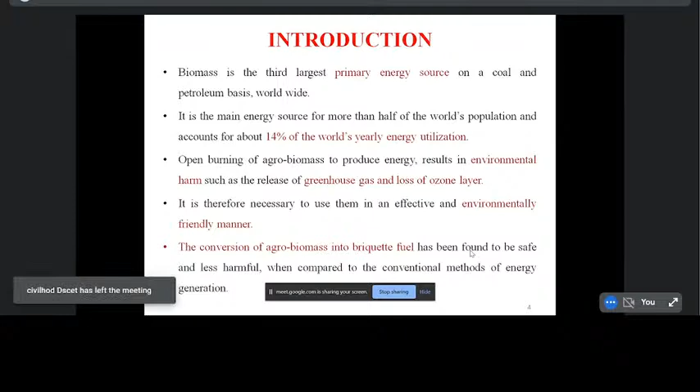Okay, so before we start the main part of the topic, I have to give some introduction about this topic. The developed and developing countries like US, China, UK, and some European countries have done a lot of research related to renewable energy, but they have failed to convert that research into industrialization. So that is the biggest problem we are facing currently.

We are facing a world energy demand. We daily see on news channels that every time all the countries, and also all the states in our country, are facing electricity problems and energy demands. Industries are also facing the energy problem. So here I am attempting to use biomass from agricultural waste.

The farmers, knowingly or unknowingly, are burning agricultural waste through open burning, which causes environmental problems, releasing greenhouse gas, causing ozone layer depletion, and also creating air pollution. So it is necessary to use them in an effective and environmentally friendly manner.

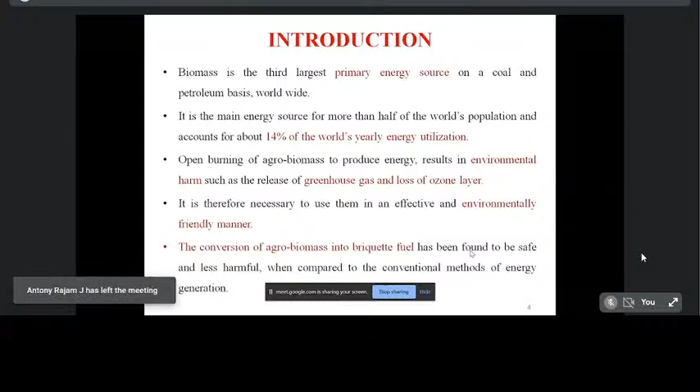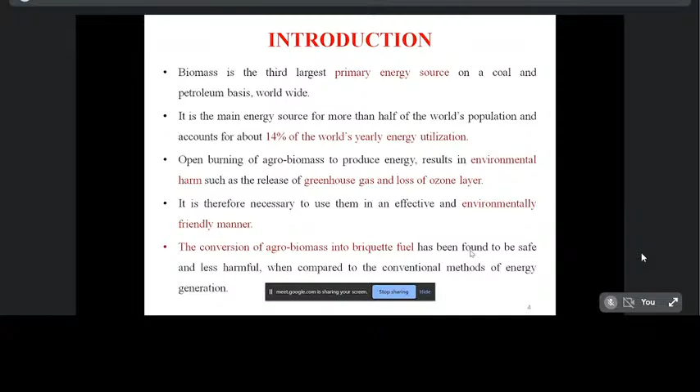So the only way is to convert the waste into a product. Here an attempt has been made to convert agricultural waste into briquette fuel. This solid biomass briquette fuel has been found to be safe and less harmful compared to coal and petroleum product usage, with much lower harmful emissions compared to other energy generation methods.

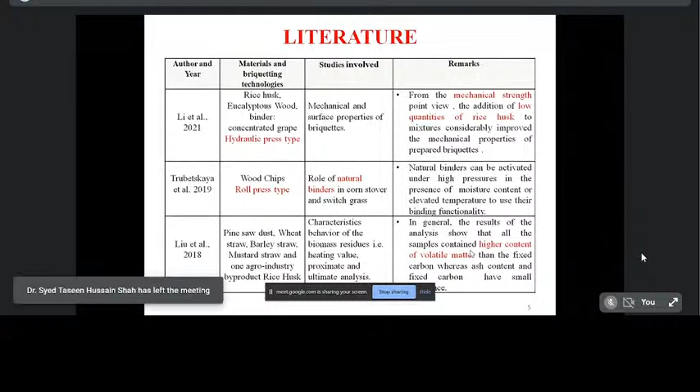Now regarding the literature review - why we take a literature review: suppose I am doing research related to biomass, or some material, or environmental sustainability, or water and wastewater treatment. Before, many researchers have studied and used different materials and different technologies, and obtained different results for their particular area. That's why I am taking some literature related to this study.

So Li et al. 2021 used the materials rice husk, eucalyptus wood, and binder concentrated grape, with the hydraulic press method. And Trubetskaya, in the year 2019, used wood chips with a roller press type method.

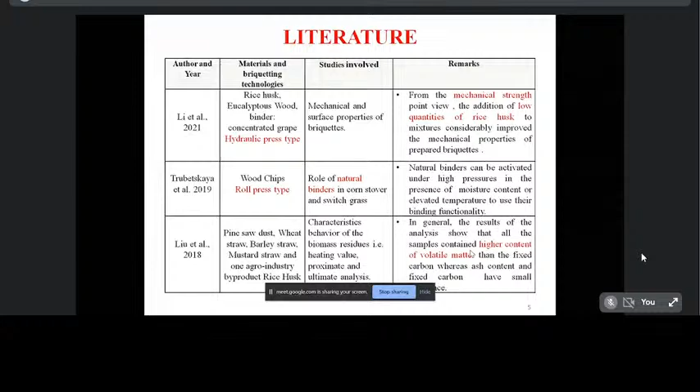So the main studies involved in this literature include mechanical properties, physical properties, biological properties, thermogravimetric analysis, and what type of binders they are using, what mixed ratios they have taken, and what mechanisms they are using - these are the things we have to infer from this literature.

From the literature I have referred, different compositions of biomass show different physical and chemical properties, and different mix ratios of the briquette show different physical and chemical properties.

During the mixing of waste materials, one or two or more than two materials, binders play a vital role in the quality of the briquettes. The binder is the important material that has to bind more than one or two materials together. Different binders also produce different quality briquettes.

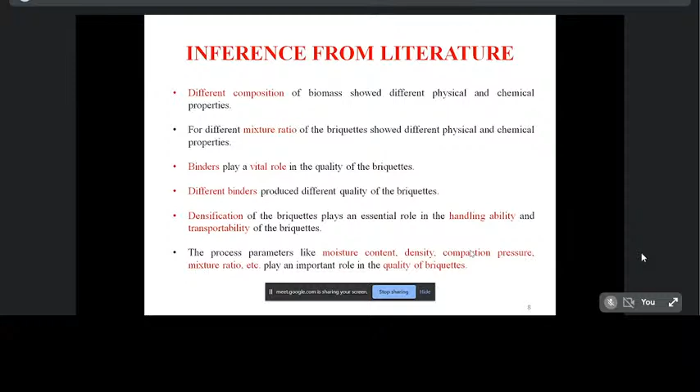In this literature, the main thing I have referred is that densification of the briquettes plays an essential role in the handling ability and transportability of the briquettes from one place to another. Without proper densification, it is not possible to transfer the produced biomass briquettes from one place to another. Process parameters like moisture content, density, compaction pressure, and mixture ratio play an important role in the quality of the briquettes.

Now, the problem identification. We know why we are taking up this type of research, why we are going to do research in that particular area. Depending upon the problems only, we have to do research. The burning of agrarian waste has become a major problem in India.

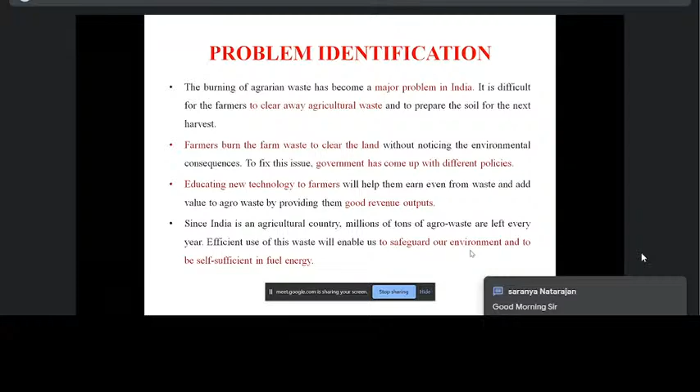For example, Delhi air pollution. It is difficult for farmers to clear the agricultural waste and prepare the soil for the next immediate harvest. So, knowingly or unknowingly, they burn their agricultural waste, which creates a lot of consequences for the environment. Farmers burn the farm waste to clear the land without noticing the environmental consequences.

To fix this issue, the government has come up with different policies. Educating farmers about new technologies will help them earn even from the waste and add value to the agricultural waste by providing good revenue. Since India is an agricultural country, millions of tons of agricultural waste are left over every year. Efficient use of this waste will enable us to safeguard our environment and become self-sufficient in fuel energy.

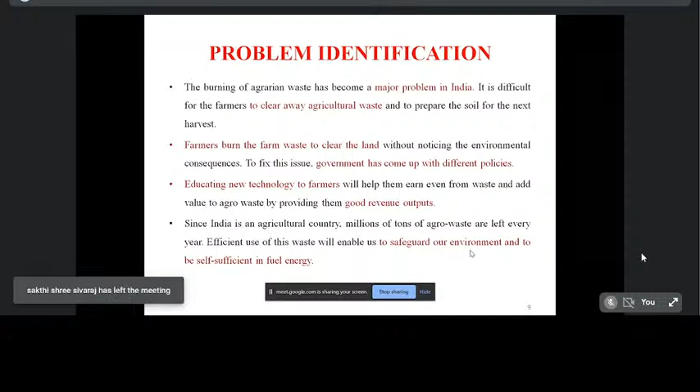According to a recent survey, it has been estimated that burning of agricultural waste residue releases about 149.24 million tons of carbon dioxide, 9 million tons of carbon monoxide, 1.28 million tons of particulate matter, 0.25 million tons of sulfur, and 0.07 million tons of black carbon during burning of agricultural waste alone in our country. This is also responsible for the haze in Delhi.

It also melts the glaciers of the Himalayas. While I was studying in school, I heard from my teachers that the Himalayan height is increasing every year. But now we are hearing that the height of the Himalayan mountains has actually decreased every year, due to the increase in temperature.

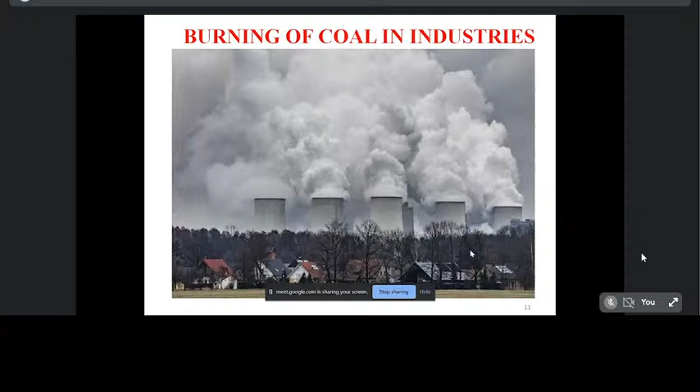There is also the generation of fly ash from burning coal. After using coal in thermal power plants, we store the generated fly ash in landfilling, either in dry condition or in wet conditions.

From the survey, it was found that the fly ash generated annually from power plants has risen from 123 million tons to 226 million tons in the year 2019-20, which is about a 76% increase compared to the previous year. As rainwater percolates into the dry form, it carries all the pollutants such as heavy metals.

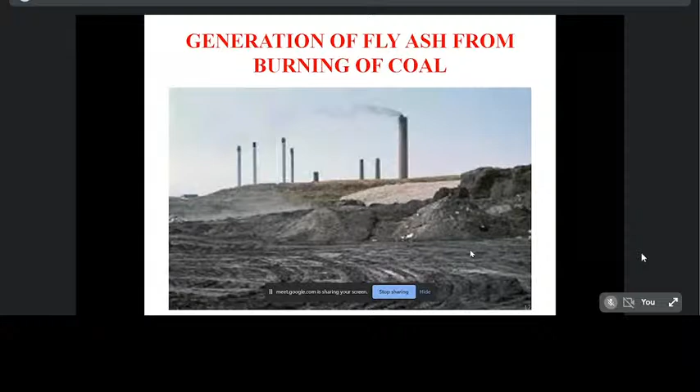Into the groundwater, it also pollutes lakes, ponds, and groundwater. This may also cause health effects for human beings who live near the mining surroundings.

Regarding deforestation, we all know this research and this topic is mainly focused on replacing the wood used in brick kilns, hotels, and other industrial boiler running purposes.

Deforestation increases the level of carbon dioxide in the atmosphere, which is a greenhouse gas and leads to global warming. It also leads to a limited supply of wood and timber, and it also leads to soil erosion.

The objectives of this study are: to investigate biomass made of different compositions for its characteristics, to optimize briquettes, and to study the quality of bio-briquettes for the effect of different combinations of agro waste with the binder.

And to study the results obtained from the physical characteristics, proximate analysis, SEM analysis, elemental analysis, DSC and TGA analysis, and the industrial applications for different fraction of mixes in the biomass briquette.

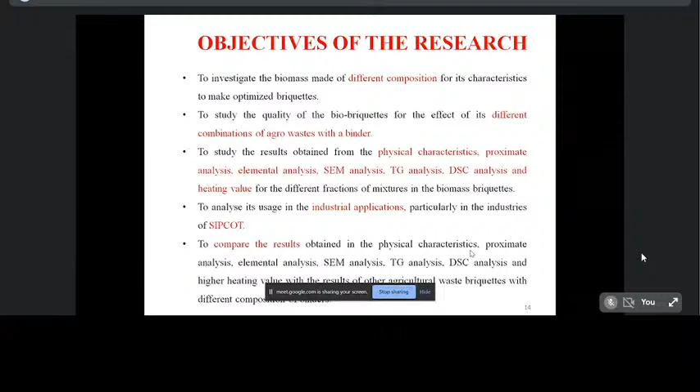To compare the results obtained from the physical characteristics, proximate analysis, elemental analysis, TGA, DSC, and heating value with the results of other agricultural briquettes with different compositions.

So regarding the methodology: before we start this research or this work, we have to frame a methodology for what we are going to do in this research.

Mainly we are focusing, suppose in civil engineering we have different streams, such as concrete technology and structural engineering, each department having a different stream. So I'm taking here the civil engineering department.

So there's environmental engineering, concrete technology, steel, remote sensing engineering, construction management, and so on. From that, we have to finalize which type of stream to take. Here I'm taking environmental engineering.

In environmental engineering, different areas are there: energy, water and wastewater treatment, carbon footprint, climatic conditions, environmental sustainability - various parts are there.

From that, I have taken waste to wealth, that is energy conversion from waste. So after finalizing the stream and area, I have taken the next level as problem identification.

So I'm mainly focusing on which type of problem I am addressing. After defining the problem, I have taken some literature review - previous studies where experts did their research related to that particular study. This means I have inference from a lot of information from that literature study.

After the literature study and information gathered from previous experts' research, I took the next step: material selection. From my area or locality, I identified what type of waste, mostly agricultural waste, is generated, and how that waste causes environmental pollution. That is how I selected the material.

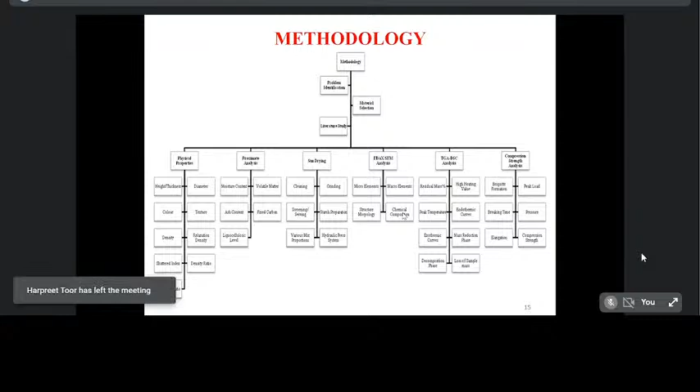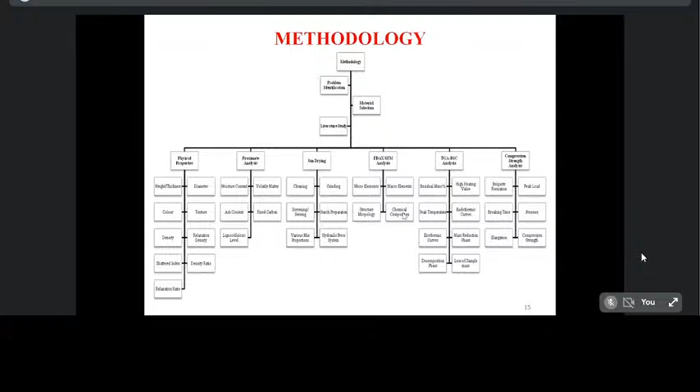Why do we study compression strength? It means we have to find out the strength of the produced biomass briquettes. Then only it is able to transport from one place to another and able to be stored for a long time. Here I have taken three different materials: sorghum, panicle, and pearl millet, used to produce the solid biomass briquette.

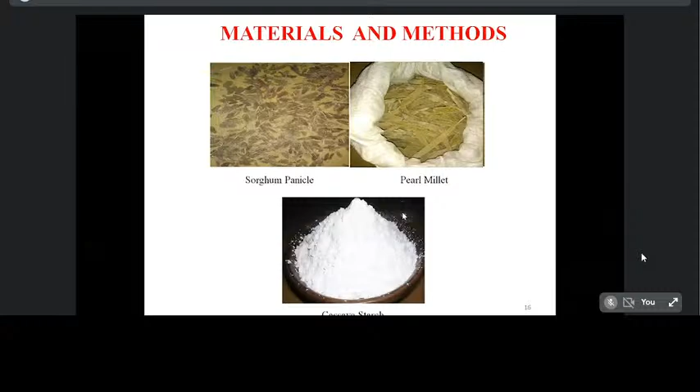Cassava starch is used as a binder, purchased from the industry. So before collecting the material, the agro waste materials sorghum, panicle, and pearl millet, we prepare the cassava starch.

This means we do some feedstock pre-processing: cleaning, drying, and size reduction. Cleaning is also simply called sieving, which is done to remove all unwanted materials, ensuring that the feedstock is of the required size.

We have to remove unwanted material present in the collected biomass materials, that means in sorghum, panicle, and pearl millet.

The next step is drying. Drying is essential, particularly if the feed is wet. Suppose we are collecting that sorghum, panicle, and pearl millet in wet condition, then we have to allow the collected agricultural waste materials to undergo sun drying.

Some materials like coffee husk, groundnut shell, and rice husk usually may not require drying. These are the sorghum panicles, corn stalk, and sunflower waste. If pearl millet is in wet condition, we definitely allow that material to undergo sun drying.

According to Solana et al. 2018, drying can be done naturally by exposing the feedstock to favorable environmental conditions to reduce its moisture content, without supplying any external heat.

If we give any external heat for drying that waste material, it will deplete the condensed moisture present in the waste materials.

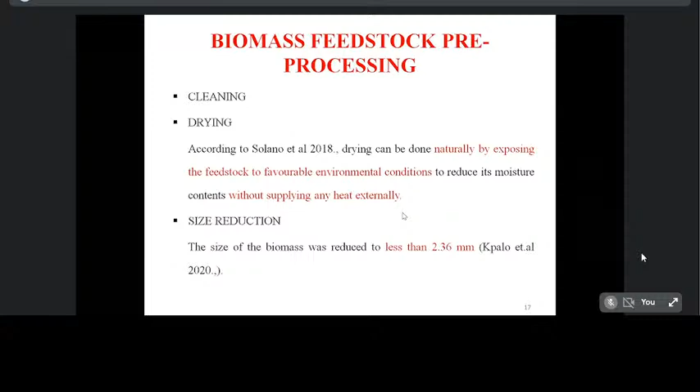Here I am taking 2.36 mm, because the smaller size of the collected agro-waste material will give the higher density.

This image shows the produced biomass briquette material being grinded and sieved, and allowed for natural drying of the agro waste materials.

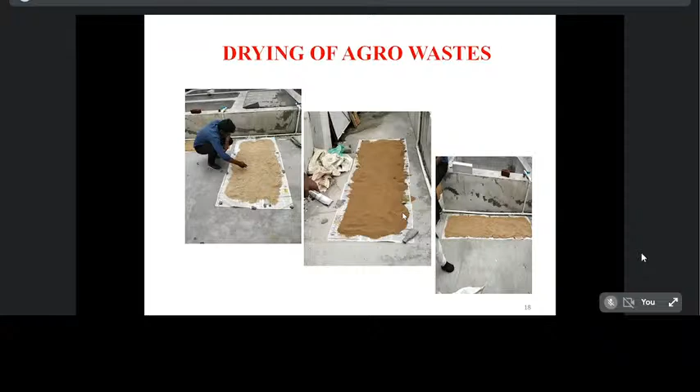The next step is binder preparation. Here I am using cassava starch as a binder for the production of agricultural waste briquettes.

The less than 0.5 mm sample is mixed with 150 ml of distilled water and made to dissolve. While preparing this cassava starch binder, proper care should be taken at this stage to avoid the formation of clogs and lumps. The formed binder solution is heated in a water bath at 100 degrees Celsius.

This is done for 10 to 15 minutes as per Sen et al. 2016. The mixture is continuously stirred until a whole paste is formed, meaning a semi-solid formation.

In the process of briquette production, the starch is added to the sample at a concentration of 10% of the weight. The produced biomass briquettes take the binder solution added as 10% of the weight.

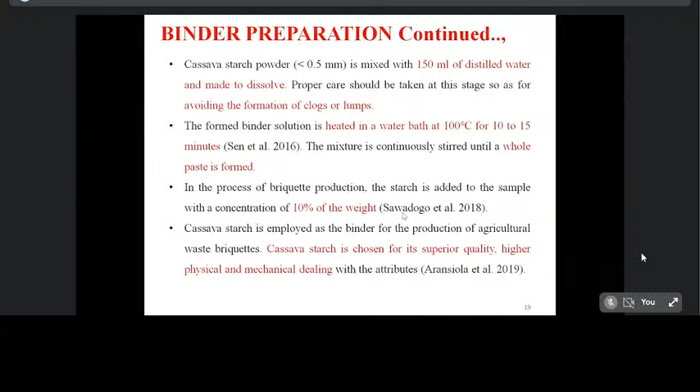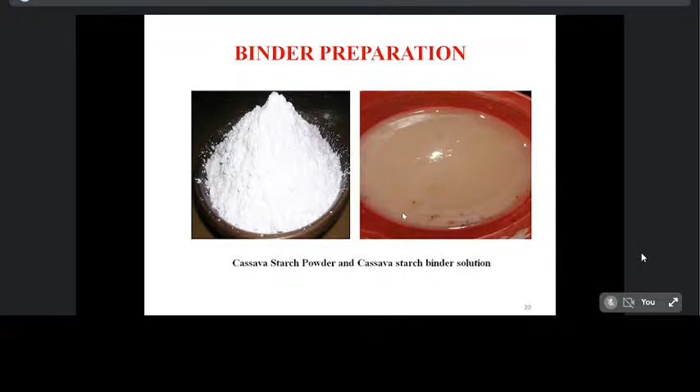This image shows the cassava starch powder, and the second image shows the produced cassava starch binder solution. After setting all the initial things, the agricultural waste material collection and initial feedstock pre-processing are completed, and the starch solution is also prepared, along with sun drying and grinding.

After all the basic things are completed, we are going to prepare a briquette mold. Here, a cylindrical briquette mold was used, having an inner diameter of 80 mm, consisting of 3 parts.

The top portion is a shaft part, the center portion is the mold, and the bottom portion is a steel plate. The cylindrical mold has a diameter of 80 mm, thickness of 8 mm, and height of 150 mm.

The compaction piston used has a diameter of 76 mm, height of 175 mm, and total weight of 10 kg. The steel plate at the bottom was attached to the edge of the base and firmly tightened.

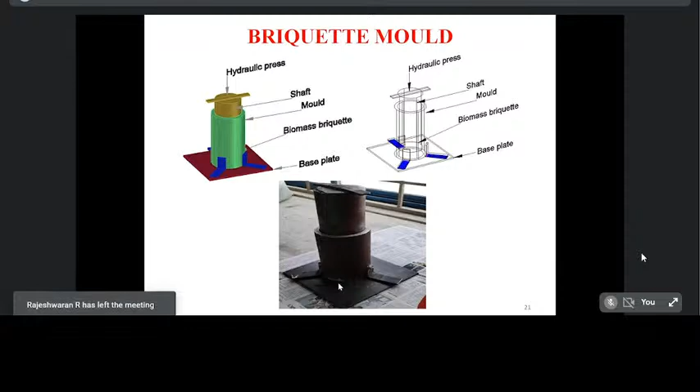The molded briquette was evacuated by expelling the plate from the base edge. The hydraulic press was used for production of the biomass briquette to get a uniform size of the solid biomass briquette. This is the machine we have in our structural engineering laboratory at Kongu Engineering College.

This machine is called the Controlled Universal Testing Machine, model TUF Servo 1000, with a maximum load of 1000 kilonewton, as illustrated in this image.

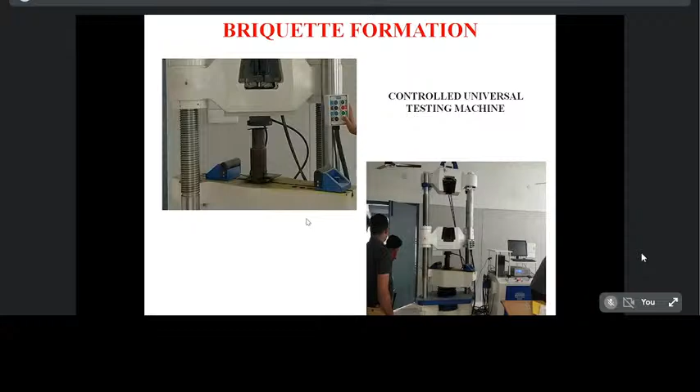Here I set a constant load of 200 kilonewton, maintained throughout the experiment. The dwelling time of each press was sustained at 60 seconds to attain constant sorghum panicle and pearl millet briquettes in all the given samples.

Regarding the mixed ratio of loose biomass, I have taken sorghum panicle and pearl millet, with a binder ratio of 10% weight.

So the two constant solid bio-briquettes produced were 100:0, meaning 100% sorghum panicle and 0% pearl millet, and 100% pearl millet with 0% sorghum panicle.

The remaining briquettes were produced under various blended proportions, such as 10:90, 20:80, 30:70, 40:60, 50:50, 60:40, and inversely mixed, combining both sorghum panicle and pearl millet.

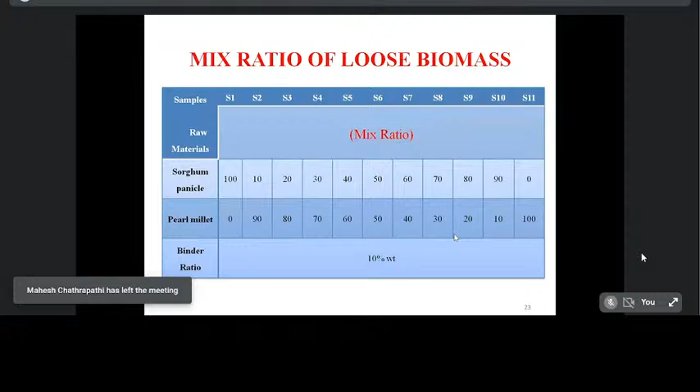While producing, different peak load levels were attained. We set a constant load of 200 kilonewton, but we got different peak load levels, which varied from sample S1 to S11.

Sample S1 had the minimum peak load of 186.440 kilonewton, attained also by S6, S7, and S8, while the maximum peak load was attained by samples S10 and S9.

Why do we see these different peak loads? The reason for the variation was the particle size of the pearl millet.

We have taken two materials here, sorghum panicle and pearl millet. The particle size of pearl millet was finer than the sorghum panicle, so the spaces between the sorghum panicle particles were closely filled by the finer particles of pearl millet.

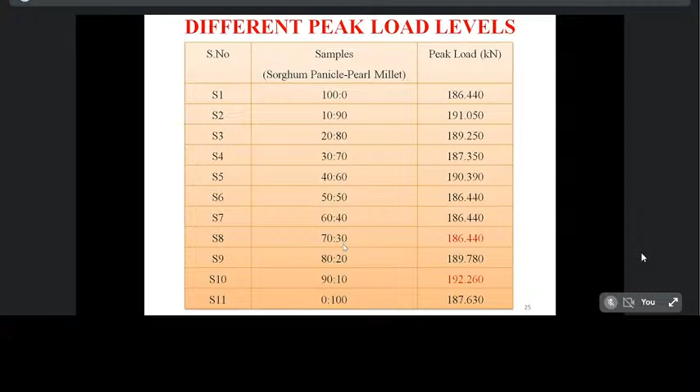This is the reason we got different peak load levels during the production of the agro biomass briquettes. This image shows the peak load graph for sample S11.

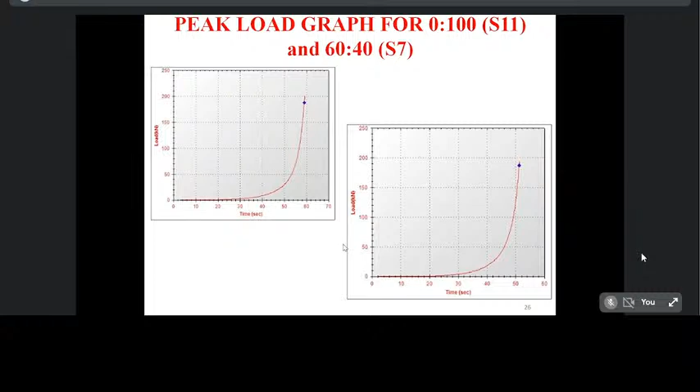Sample S11 is 0% sorghum panicle and 100% pearl millet, and sample S7 is 60:40, meaning 60% sorghum panicle and 40% pearl millet.

Coming to the results and discussion, the produced briquettes were tested for physical characteristics, proximate analysis, compression strength test, EDAX analysis, SEM analysis, TGA DSC analysis, industrial application, and comparison analysis.

Initially we are discussing the physical characteristics of the produced biomass briquette. All the produced biomass briquettes were analyzed based on ASTM standards, American Standard Testing Methods. The physical properties analyzed in this study are limited to diameter, height, thickness, mass of the produced biomass briquettes, volume, density, mass in relaxed stage, relaxed density, density ratio, relaxation ratio, shatter index, texture and color.

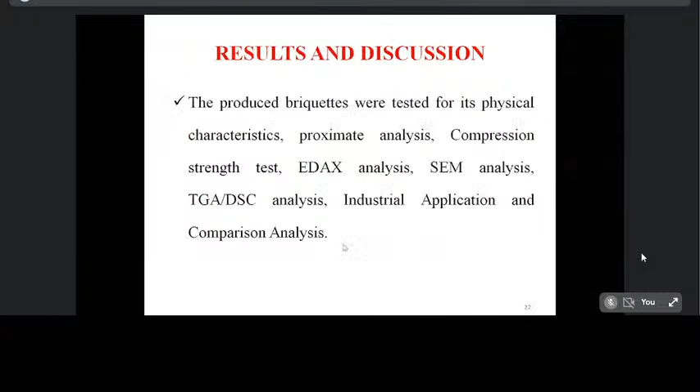The thickness of the sample ranged between 55 mm to 65 mm. This thickness range is the main reason for the voids present in the particular mixed proportions.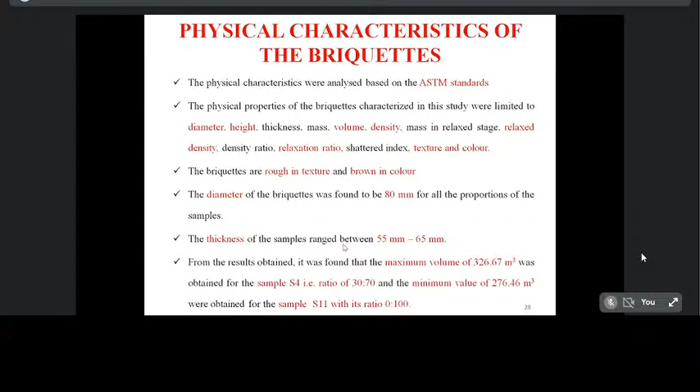From the results obtained, it was found that the maximum volume of 326.67 cubic meters was obtained in sample S4, and sample S11 attained the minimum value of 276.46 cubic meters.

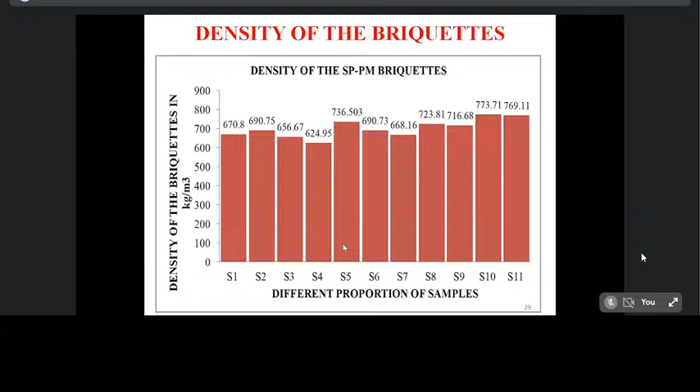This image shows the different densities of the briquettes from the samples. Sample S4 has the minimum density value of 624.95 kg per cubic meter, and sample S10 has the maximum density value of 773.71 kg per cubic meter. So the compressed density of sorghum panicle and pearl millet briquettes ranges from 624.95 to 773.71 kg per cubic meter.

This satisfies the minimum value. The density value required is 600 kg per cubic meter, as recommended by Mani et al. 2006, for efficient transportation and safe storage. The particle size of the raw materials is another consideration impacting density, because smaller diameter or smaller size agricultural waste particles give higher density.

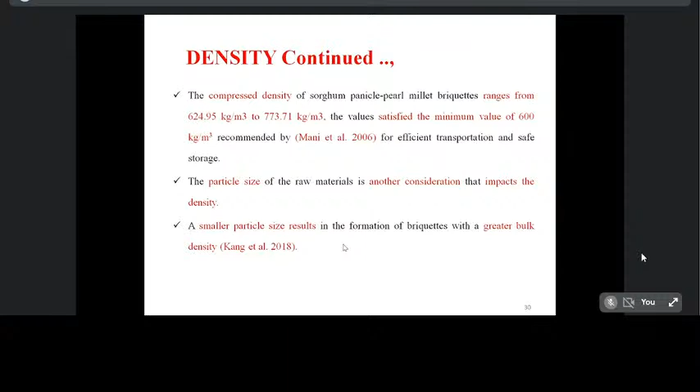Sample S6 has the lowest mass in relaxed stage at 197.86 grams for the sample ratio 50:50, and sample S10 has 208.14 grams for the sample ratio 90:10.

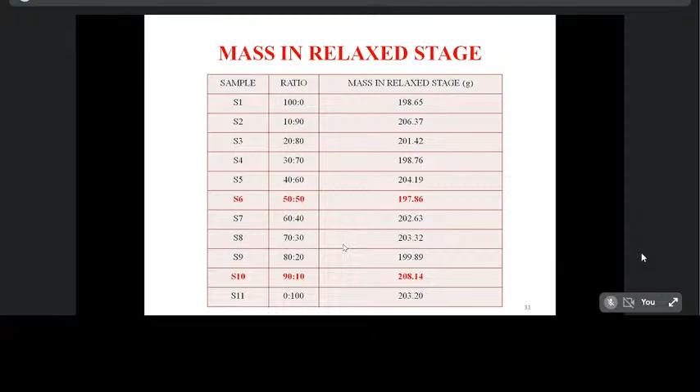The relaxed density of the sorghum panicle and pearl millet briquettes shows the minimum value achieved by sample S4 at 608.44 kg per cubic meter, and the maximum relaxed density achieved by sample S10 at 740.34 kg per cubic meter.

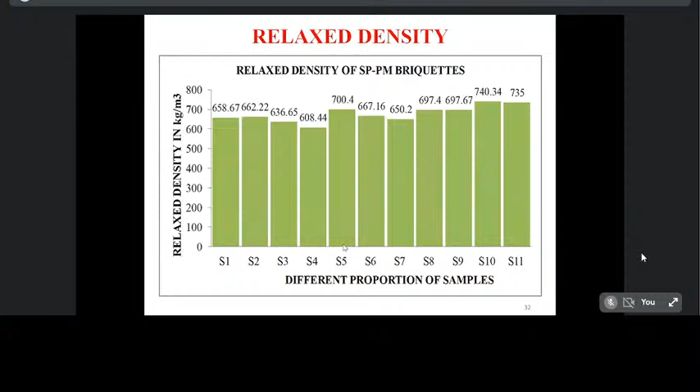The relaxation ratio, when greater than 1, also indicates good quality briquette. Here all the produced biomass briquettes achieve a relaxation ratio more than 1. The minimum value achieved is 1.019 for sample S1 with ratio 100:0, and the maximum value achieved is 1.052 for sample S5 with ratio 40:60.

The briquette shatter index was determined according to ASTM for the drop shatter test, developed for coal, using a specific equation. The shatter index equals the weight of the briquette retained on the screen after dropping. We drop the briquette from 1 to 1.5 meter height.

Each time, we have to drop the produced biomass briquette 3 times, noting the weight of the briquette after each drop. So it's weight after dropping divided by weight of the briquette before dropping. We weigh the briquette before dropping, and after each of the 3 drops we note the weight of the produced biomass briquette again.

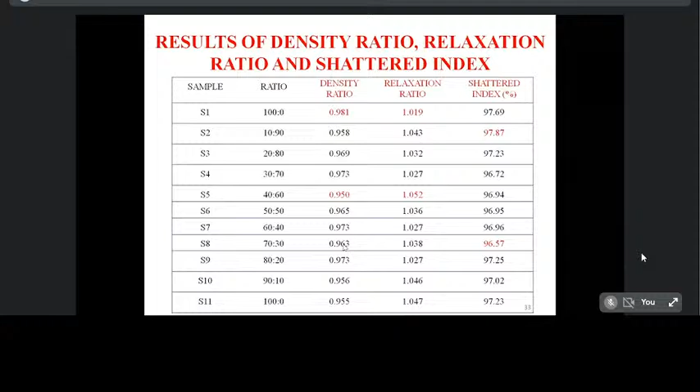A greater than 90 shatter index is achieved as a good quality for the produced biomass briquettes. Here all the produced biomass briquettes have more than 95. The minimum value was achieved for sample S8 with mixed ratio 70:30, with a shatter index of 96.57, and the maximum shatter index of 97.87 was achieved for sample S2.

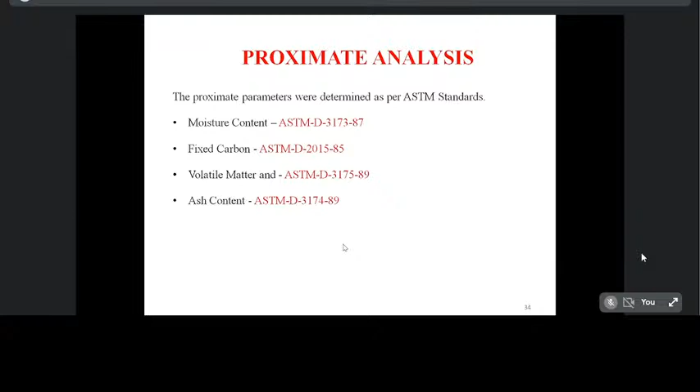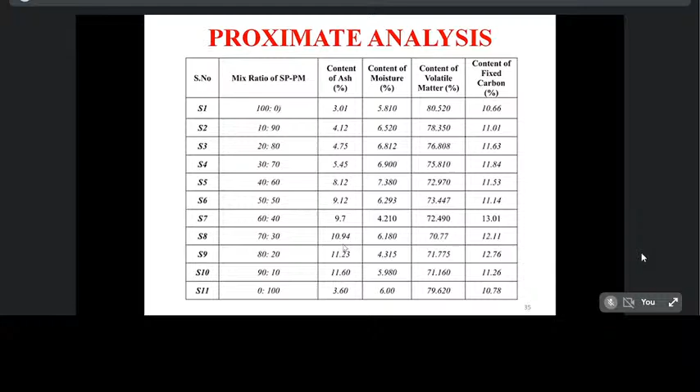Here the ash content values range from 3.01 to 11.60, and moisture content ranges from 4.21 to 7.380. The volatile matter also ranges from 70.77 to 80.520, and fixed carbon values range from 10.66 to 13.01 for sample S7.

The moisture content ranged between 4.21% for the minimum sample S7 and 7.38% for the maximum sample S5. These results agree with the study by Pallavi et al. 2013, which suggested that moisture content of 5% to 10% indicates a good quality briquette.

For ash content, the minimum value achieved was 3.01% and the maximum was 11.60% for samples S1 to S10. The ash content of the other mixing ratios was found to be within the acceptable limit, which ranges between 5 to 40 weight percentage. Here we get only 3.01% minimum and 11.60% maximum for the solid biomass briquette, as per the United Nations Environment Programme 2014.

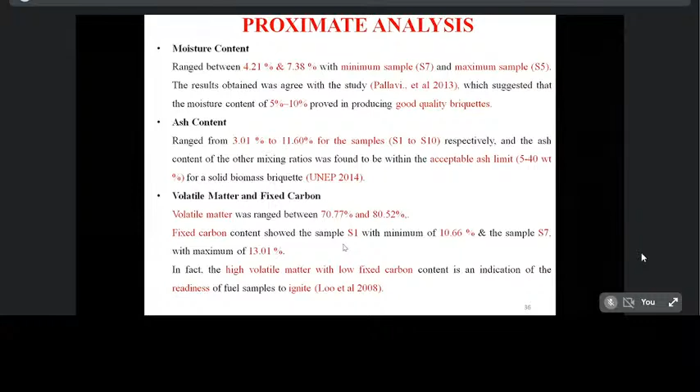The volatile matter and fixed carbon ranges also varied. In fact, high volatile matter with low fixed carbon content is an indication of the readiness of the fuel sample to ignite, according to Loo et al. 2008.

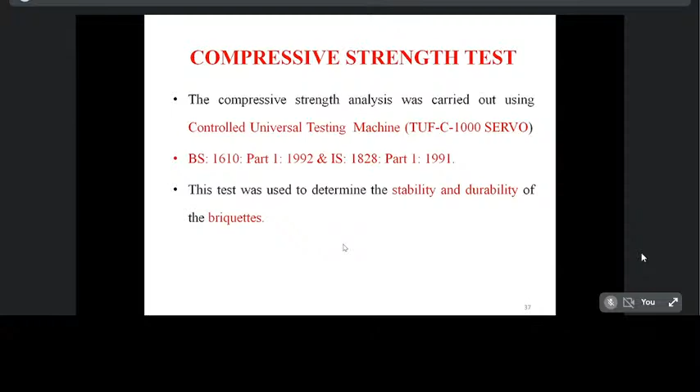Next is the compressive strength test. The same produced equipment was used to find out the compression strength testing. The machine is a controlled universal testing machine, model TUF-C-1000 Servo, working as per British Standard 1610 Part 1 1992 and Indian Standard 1828 Part 1 1991. This test was used to determine the stability and durability of the briquette.

This image shows the initial setup made with the controlled universal testing machine, and load was given. The second image shows the load being applied, and the final third image shows the cracks developed in that particular produced biomass briquette.

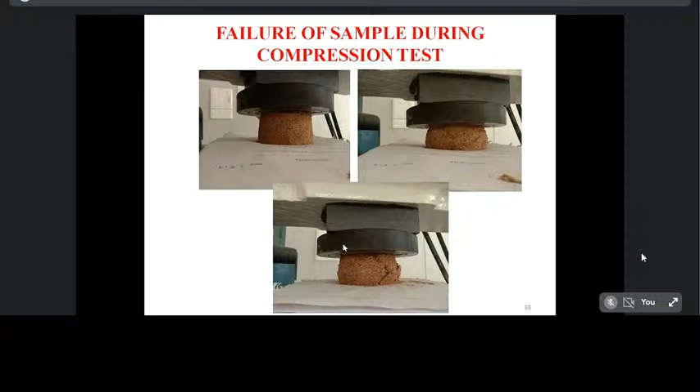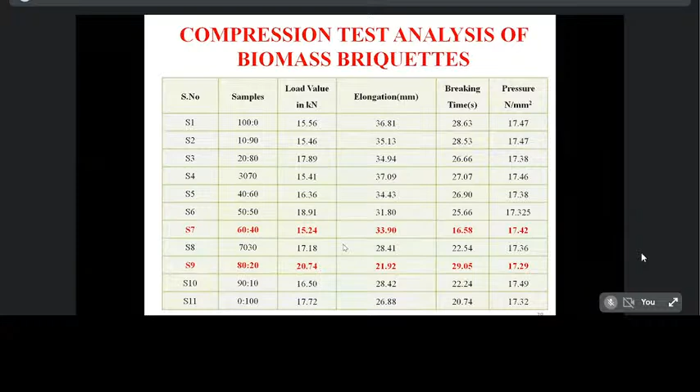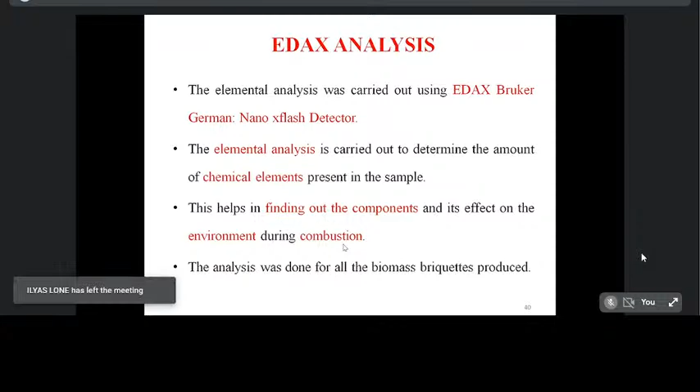Next is the elemental analysis, carried out using an EDAX Bruker German Nano xflash detector. This elemental analysis is used to determine the amount of chemicals, meaning the micro and macro elements present in the particular biomass briquette. It also helps to identify the components and their effects on the environment during combustion.

This table shows the various elemental analysis characteristics of the produced biomass briquette. We found nearly 14 elements: carbon, oxygen, potassium, calcium, chlorine, sulfur, phosphorus, silicon, aluminum, magnesium, copper, iron, zinc, and sodium.

Sample S5 has the minimum carbon content at 48.06%, and sample S9 has the maximum carbon content at 55.52%. The second leading value is oxygen, at 44.30% for sample S5 and 41.94% for sample S9. The remaining elements, nearly 12 of them, fall under acceptable values.

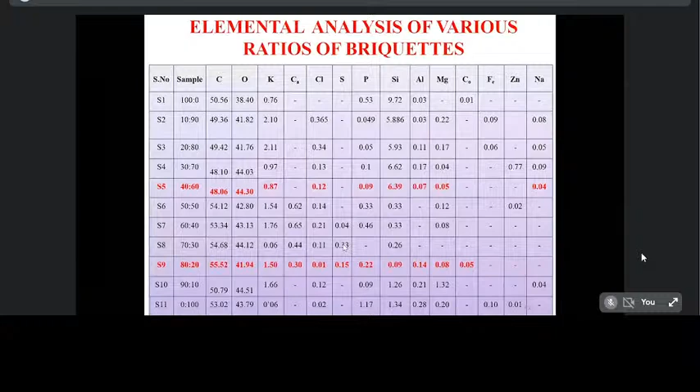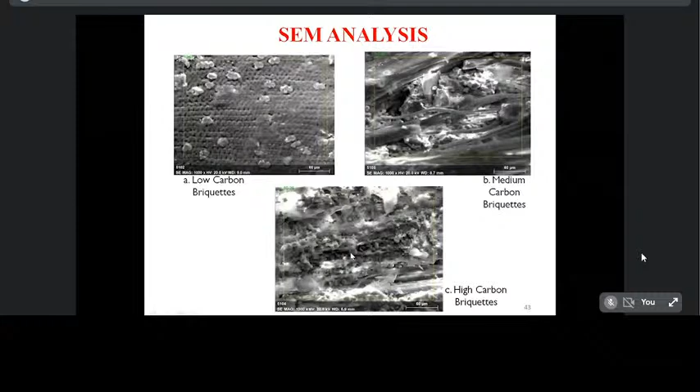Okay, so the TGA analysis. Thermogravimetric analysis is also used with the NETZSCH STA449F3 model, used to find out the percentage of weight loss or the residual mass of the briquettes made from sorghum panicle and pearl millet. This TGA analysis instrument is also operated based on the principles of ASTM D3418.

Here, 11 samples were produced from the solid biomass waste, but we have taken only 6 samples for the TGA and DSC analysis, based on the carbon percentage. The sample S1 has the highest weight loss, that is 28.28%, with a burning temperature of 547.9 degrees Celsius. The sample S9 has 26.07%, the lowest weight loss percentage, with their mixed ratio of 80% sorghum panicle and 20% pearl millet, and their burning temperature is 547.9 degrees Celsius.

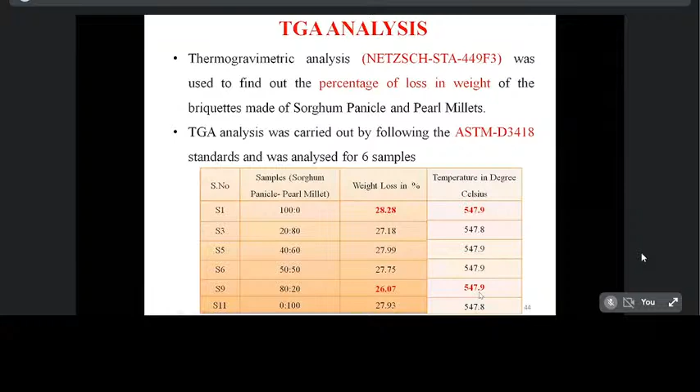This image shows the TGA and DSC analysis of the samples S1 and S9.

The reduction in the mass of the sample was observed starting from 100%. The reduction in mass loss was observed below 100 degrees Celsius, in the portion from 100 to 90, and this reduction is due to residual moisture loss. So there is no decomposition of the sample from 100 to 90. The curve was linear in the temperature range between 100 to 200 degrees Celsius, and from 100 to 200 degrees there is no decomposition, no deviation in the TGA curve.

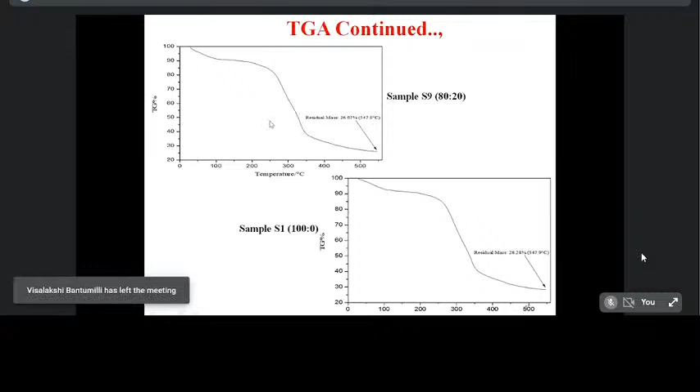Between the temperature 240 to 330 degrees Celsius, we assume a single stage decomposition is observed, mainly due to the reduction of mass of the sample. This single stage reduction is where carbon is converted into carbon dioxide and carbon monoxide, so the mass loss of the sample gets gradually reduced due to reduction in the composition of the combustible substances. The weight loss was found to be 28.28% at the temperature of 547.9 degrees Celsius, which is mainly due to the presence of non-combustible substances and ash.

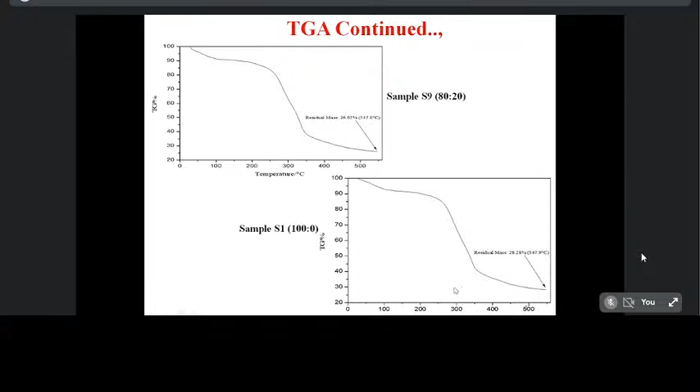The next one is the differential scanning calorimetry analysis. Here, the same samples S9 (80:20) and S3 (20:80) were used. The minimum peak value was achieved by sample S3 at 340.7 degrees Celsius, and the maximum heating value was achieved by sample S9 at 342.6 degrees Celsius. The differential scanning calorimetry analysis was used with the same TGA analysis instrument, used to find out the heating value of the produced biomass briquettes.

Here the reaction starts with exothermic and endothermic, both reactions applied here, forming an exothermic and endothermic reaction. Initially it started with exothermic and suddenly dropped to endothermic, with temperatures for both figures at 89.36 degrees Celsius to 76 degrees Celsius. The initial sudden exothermic to endothermic reaction happened mainly due to the sudden moisture loss of the produced biomass briquette.

The reaction becomes exothermic from the temperature 225 degrees Celsius for samples S9, S1, and S3, due to the release of energy from combustion of the organic matter. The distinct peaks were attained at temperatures 342.6 degrees Celsius and 340.7 degrees Celsius. The DSC curve was associated with the combustion of sorghum panicle and pearl millet, as the exothermic peaks achieved show the results of releasing energy by decomposition of fixed carbon and residual lignin.

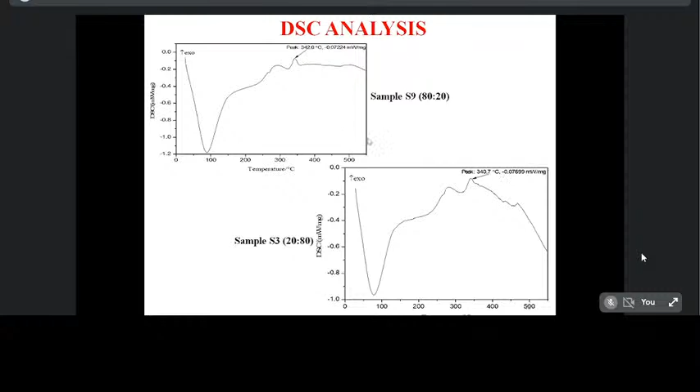So the next one is an industrial application. The produced biomass briquettes are involved in industrial application for two companies: Perundurai Common Effluent Treatment Plant and Shakti 19 Private Limited, located nearby in our college, in Sipcot Industrial Estate, Perundurai, Tamil Nadu.

The results from Perundurai Common Effluent Treatment Plant showed that briquettes with 80% sorghum panicle and 20% pearl millet satisfy the requirements of relevant activities like combustion heat, total moisture, and ash content. They also certified that with slight or no modifications, the briquette can be effectively used as a fuel energy source in treatment plants for boiler running purposes.

The briquette tested from Shakti 19 Limited showed that the combustion of 40% sorghum panicle and 60% pearl millet gives good combustion with minimum ash. The 40-60% biomass briquette and 80-20% biomass briquette also showed good combustion with minimum ash. They certified that the combination of briquettes can be efficiently used as a fuel energy source for industrial use in future.

This image shows the kiln furnace of the industry in Sipcot area, while burning the produced biomass briquette in the particular industries.

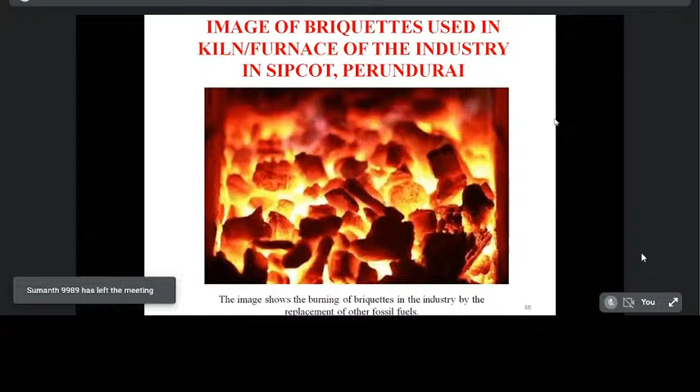So the comparative analysis of the physical characteristics of briquette - various materials are used here. Previous studies indicate various materials used with various particle sizes, ranging from 0.425 mm to 10 mm. Here we have taken less than 2.6 mm.

The diameter also varied from 24 mm to 96 mm. The height of the briquette also varied from 8-9 mm to 210 mm. Here they are using various technologies for production of biomass briquette: hydraulic press system, cylindrical die system, and vibratory block mold system.

The density is also varied - from 580, I mean 0.58, 580 kilogram per meter cube to 1100 kilogram per meter cube. The produced biomass briquette satisfies 716.68 kilogram per meter cube.

Most studies do not follow the shattered index value. The value taken for sawdust and neem as per Rajaseenivasan et al. 2016 has a shattered index value of 75%. But here we have produced sorghum panicle pearl millet briquette having 97.25%.

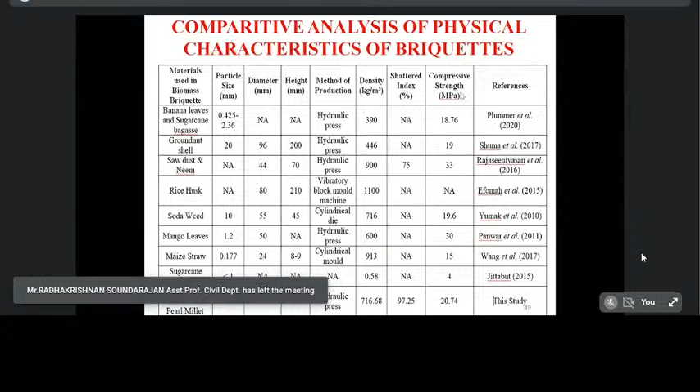The compression strength is also varied from 4 megapascal to 20.74 megapascal. So the comparative study of the proximate analysis of the biomass briquette - the proximate analysis indicates moisture content, ash content, fixed carbon and volatile matter.

The moisture content varied from 3.76% to 18.20%. Our study indicates 4.315%. The ash content varied from 0.69% to 24.43%, and fixed carbon indicates 5.7% to 73.04%. The volatile matter also varied across all the produced biomass briquettes. The produced sorghum panicle and pearl millet briquettes satisfy all the proximate analysis requirements.

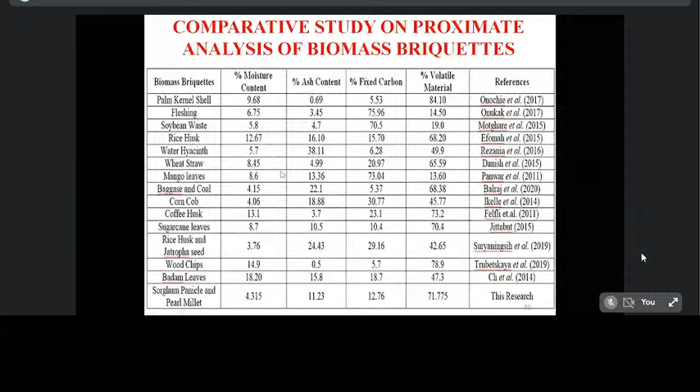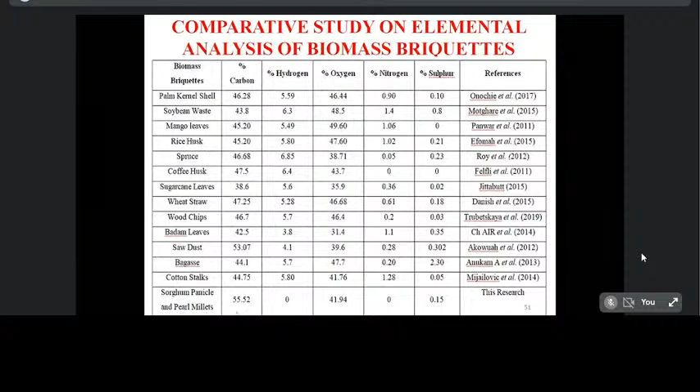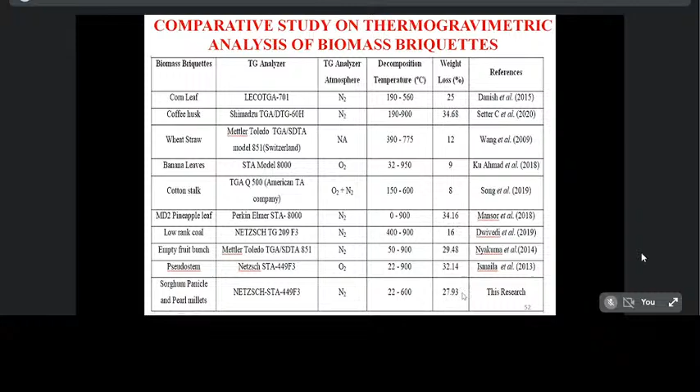The thermogravimetric analysis - all the produced biomass briquettes are compared with various biomass briquettes using different TGA analyzers with different atmospheres: nitrogen atmosphere, some equipments in oxygen atmosphere, and some in both nitrogen and oxygen atmosphere. Using the nitrogen atmosphere, produced biomass briquettes showed weight loss varying from 8% to 34.68%. Here the produced biomass briquette has 27.93%.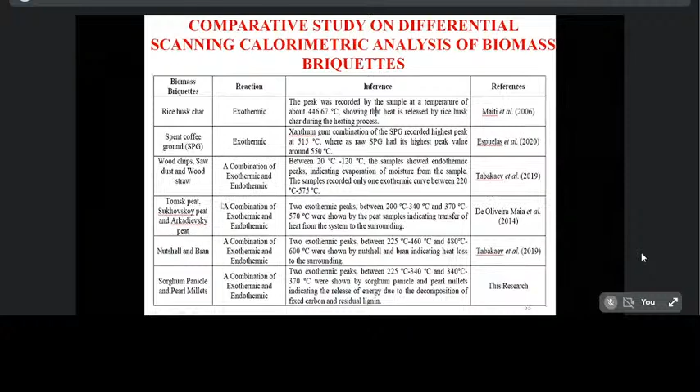So here the conclusion: the study has included handling factors such as density. The high density value is 773.71 kilogram per meter cube for sample S10, and the relaxed density is also highest for the same sample. Density is the main indicator for transporting the produced biomass briquette from one place to another. The maximum density ratio was achieved for sample S10 at 0.986, and the relaxation ratio was achieved for sample S10 at 1.047.

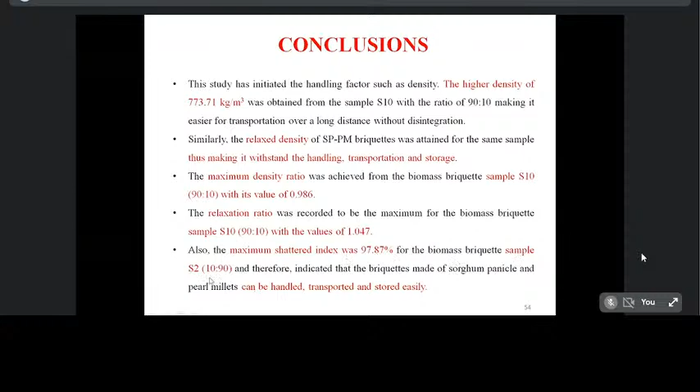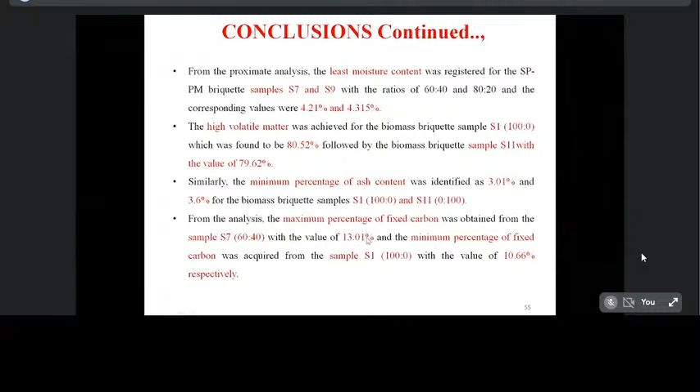The maximum shattered index was achieved as 97.87% for sample S2, and in the proximate analysis the least moisture content was achieved for samples S7 and S9 as 4.21% and 4.315%. High volatile matter was achieved for sample S1 as 80.52% and S11 as 79.62%, and minimum percentage of ash content was achieved for sample S1 as 3.01% and S11 as 3.6%. Fixed carbon was also achieved for sample S7 as 13.01% and S1 as 10.66%.

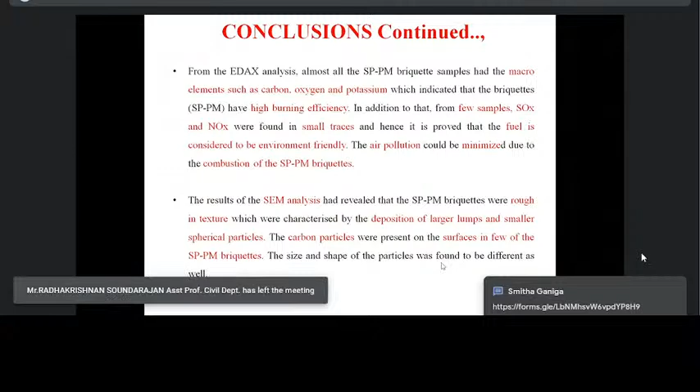The EDAX elemental analysis indicates macro and micro elements. Carbon is the leading value and oxygen is the second leading value. Potassium is also found in the produced biomass briquette. In addition, from a few samples SOx and NOx were found in small traces, which proves the fuel is environmentally friendly. Using this type of agricultural waste solid biomass briquette also reduces air pollution in the atmosphere.

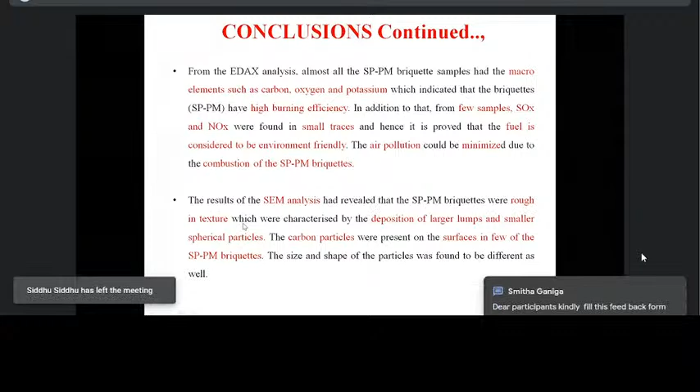The results of SEM analysis revealed that the sorghum panicle and pearl millet briquettes were rough in texture, with deposition of larger lumps and small spherical particles spread over the surface. Carbon particles were present on the surface in a few of the sorghum panicle and pearl millet briquettes.

The TGA curve was used to find out the weight loss. The initial weight loss was achieved below 100 degrees Celsius due to reduction of moisture content, and between 240 to 350 degrees Celsius the pyrolysis of hemicellulose and lignin was observed in the initial stages. The third part of decomposition occurred above 350 degrees Celsius during decomposition of complex lignin.

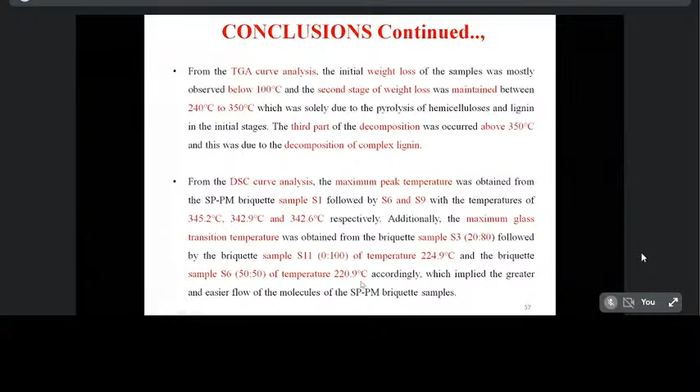From the compression strength test, we achieved the maximum withstand load of 20.74 kN for sample S9, and for sample S7 the minimum withstand load was 15.24 kN.

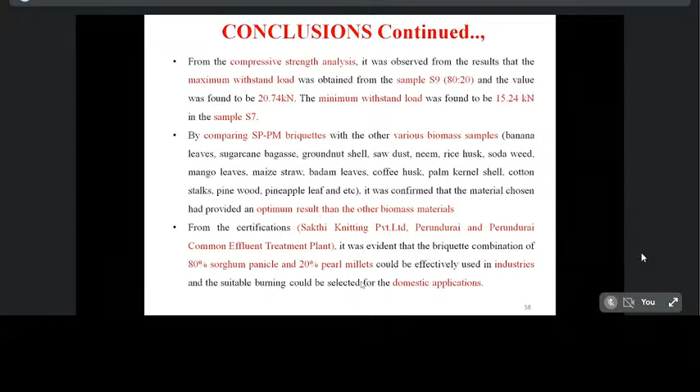By comparing the sorghum panicle and pearl millet briquettes with various other samples like banana leaves, sugarcane bagasse, groundnut shells, coffee husk, sawdust, neem, rice husk, soda weed, and mango leaves, it was confirmed that the material chosen has proven optimal results compared to other biomass briquettes. From the certifications of the Perundurai Common Effluent Treatment Plant and Sakthi Knitting Private Limited, it was evident that the briquette combination of 80% sorghum panicle and 20% pearl millet could be effectively used in industrial and domestic applications.

Good morning to all. If you have any doubts, you can ask the chief guest. No doubts? Shall we wind up, sir? Yeah, there are no queries, so we will end the session. Okay sir, okay sir, thank you sir. Thank you, sir.